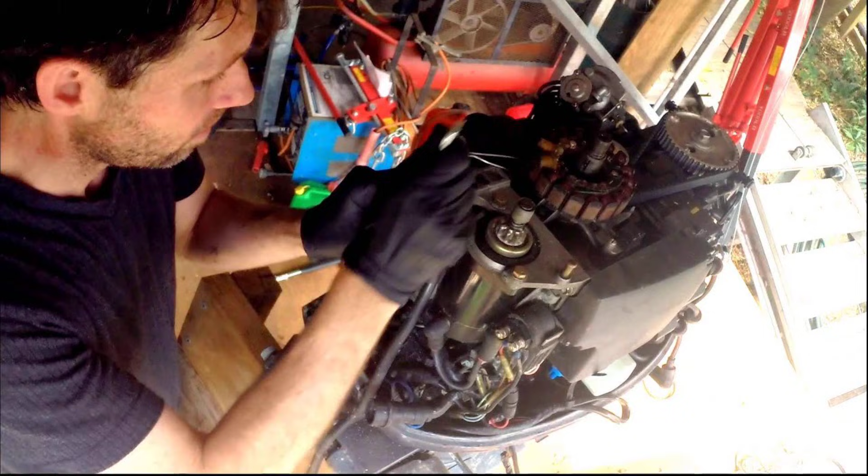A guy on a boating forum posted something that made me stop scrolling. He brought his Honda BF50 into a dealer because the engine was locking up every few rotations. Felt like the power head was seizing. The dealer quoted him over $2,500 for a rebuild, maybe a new motor entirely at $8,000.

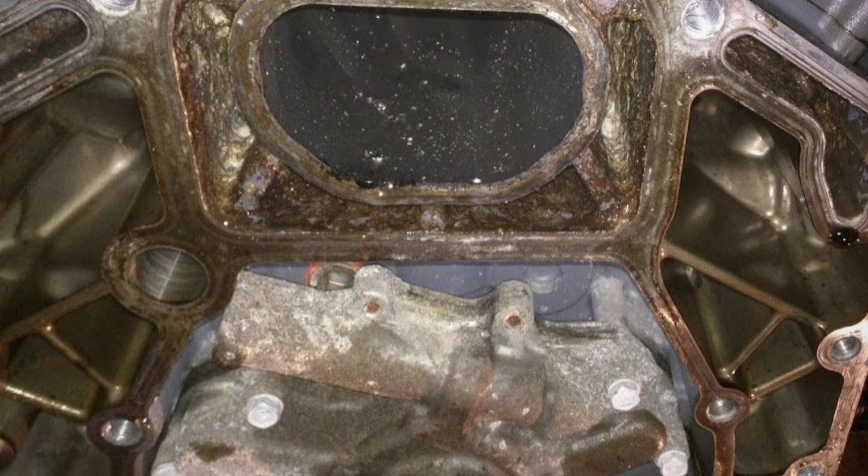The actual problem? A sheared flywheel key, a tiny metal pin that costs about $2 at any marine parts counter. 30 minutes with a socket wrench and the engine ran like new.

And that story is not even the most dramatic one. Because across every major boating forum, from the Hull Truth to iBoats to Club Sea Ray, the same pattern shows up over and over. Boat owners walk into marine dealerships with simple symptoms, walk out with repair quotes in the thousands, and later discover the fix cost less than a sandwich.

So today we are breaking down the cheap outboard parts that dealers are praying you never learn about, starting with the one that saves more boat owners more money than any other single fix in outboard repair.

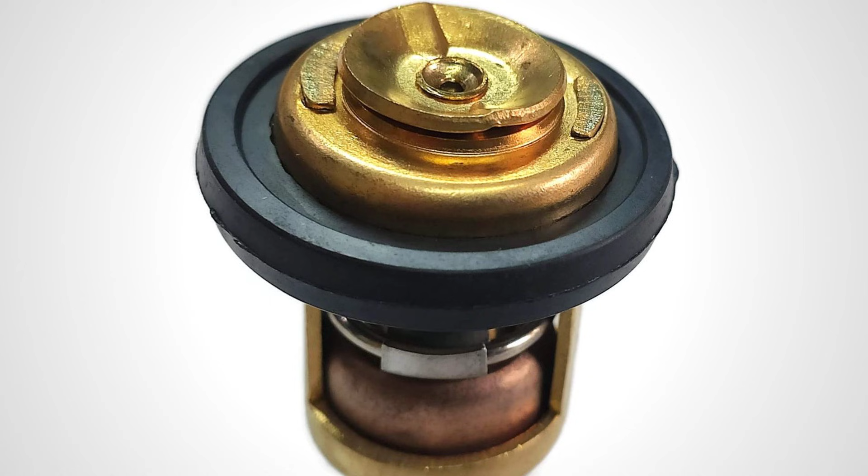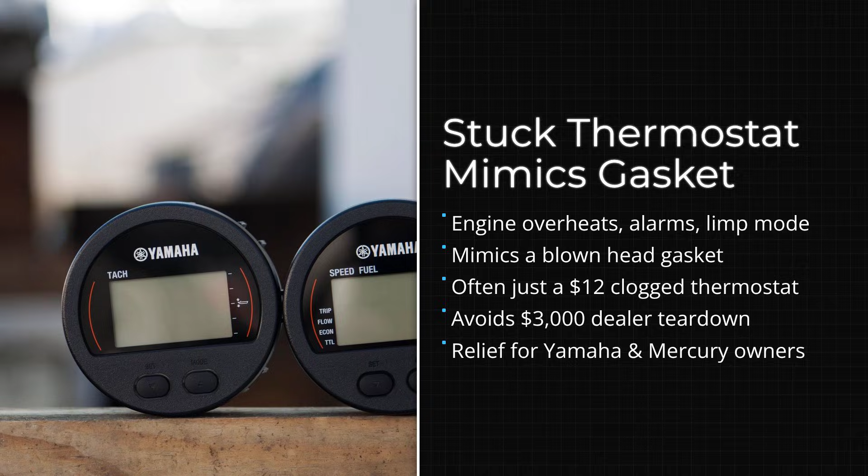The outboard thermostat. This little disc sits inside your engine's cooling system and controls water flow based on temperature. When it works, you never think about it. When it sticks closed, your engine overheats, throws alarms, drops into limp mode, and can even push milky residue into your oil. That milky oil is the trap.

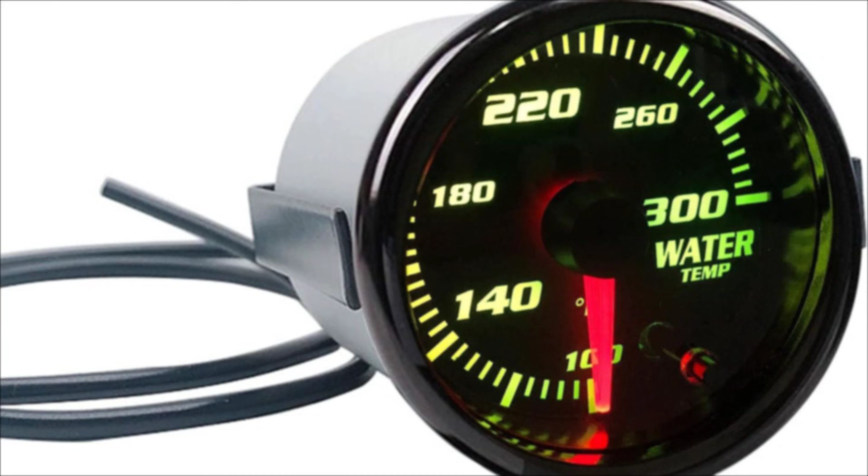Because to a dealer running diagnostics on your Yamaha F150 or your Mercury 4-stroke, milky oil plus overheating looks exactly like a blown head gasket. And a head gasket job on an outboard runs anywhere from $1,500 to $3,000 depending on the shop.

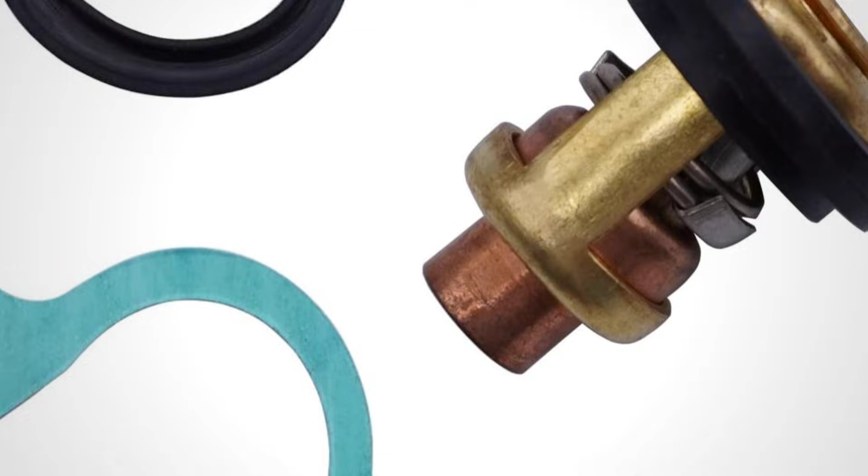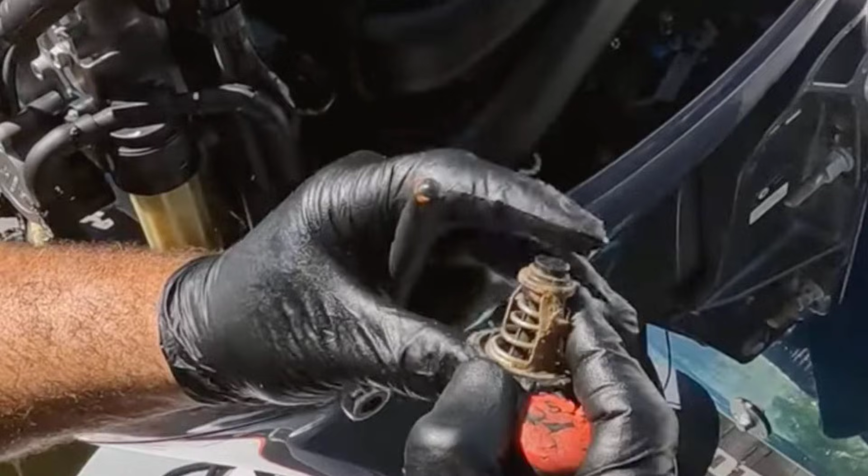But the thermostat itself, an aftermarket Sierra replacement, costs between $6 and $14. The OEM Yamaha version runs about $26 to $32. Either way, you are looking at a 15 to 30 minute swap with basic hand tools. No special equipment, no dealer software, just a screwdriver, a socket set, and a new gasket.

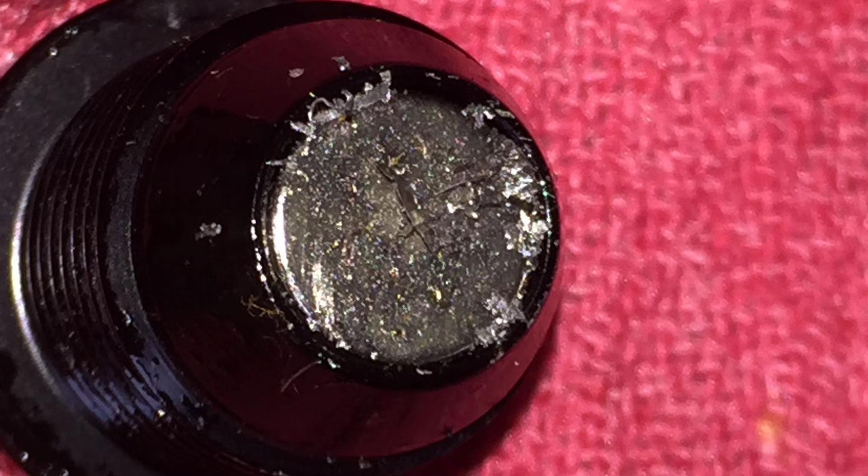On one forum, a Yamaha F150 owner traced his repeated safety mode shutdowns to a tiny piece of old gasket material that had lodged itself in the thermostat spring. That sliver of debris was the entire problem. The dealer had already started talking about cooling system overhauls.

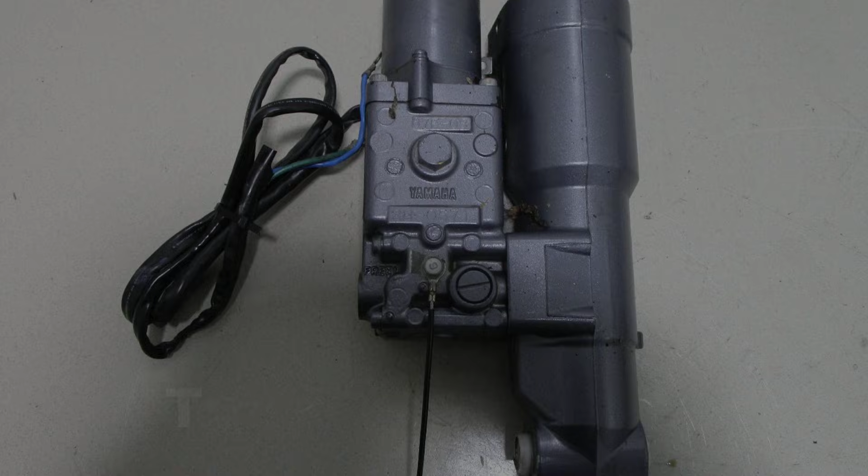Now, the thermostat is the biggest money saver, but the most satisfying fix might be this next one. Your outboard's trim and tilt system uses a hydraulic pump to raise and lower the motor. That pump is controlled by standard 5-pin 12-volt relays, the exact same type of relay you would find in any car on the road. When one of these relays fails, your trim stops working in one or both directions, and that is when the quotes start flying.

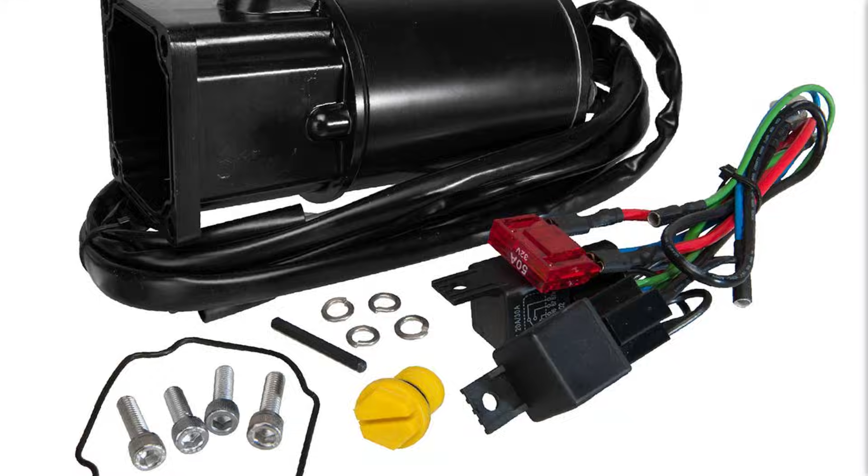Dealers will tell you the trim motor needs replacing at $400 to $800, or the hydraulic system needs a full rebuild at $800 to $2,000. Some will quote a complete new trim assembly north of $1,000.

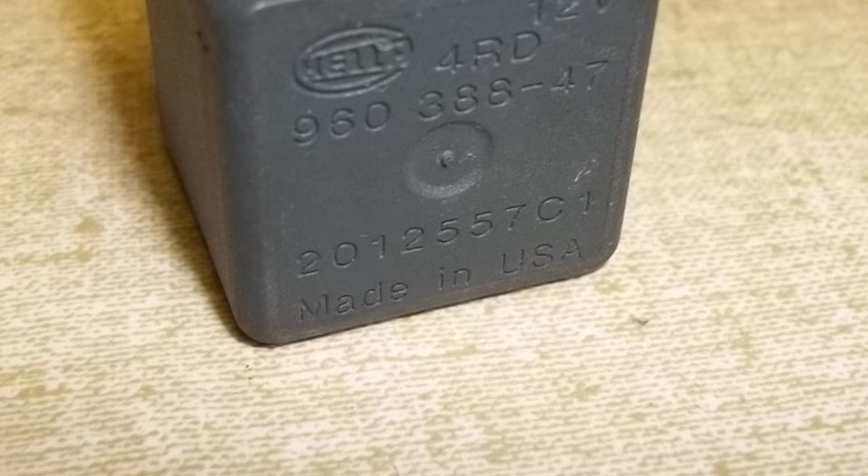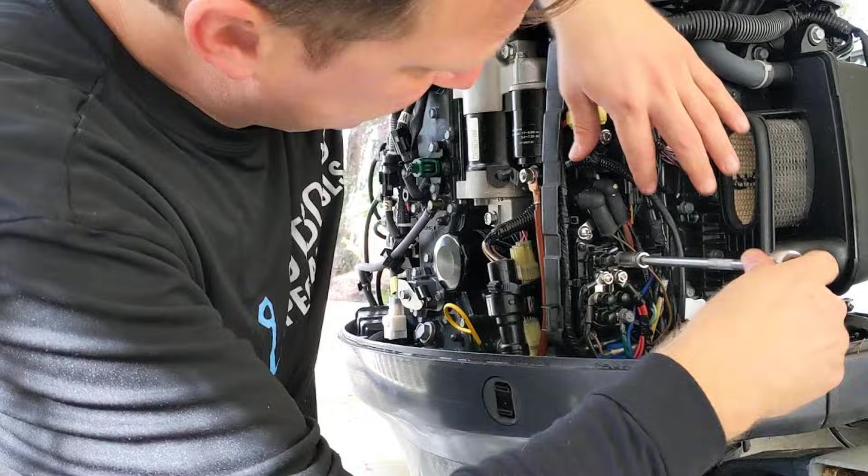The OEM Yamaha relay assembly lists for $289 from authorized sellers, but the functional relay inside that assembly is a commodity automotive part. One iBoats member bought a case of 100 waterproof relays for under $2 each. Even buying a quality single relay at AutoZone runs $10 to $15. The swap takes about 15 minutes.

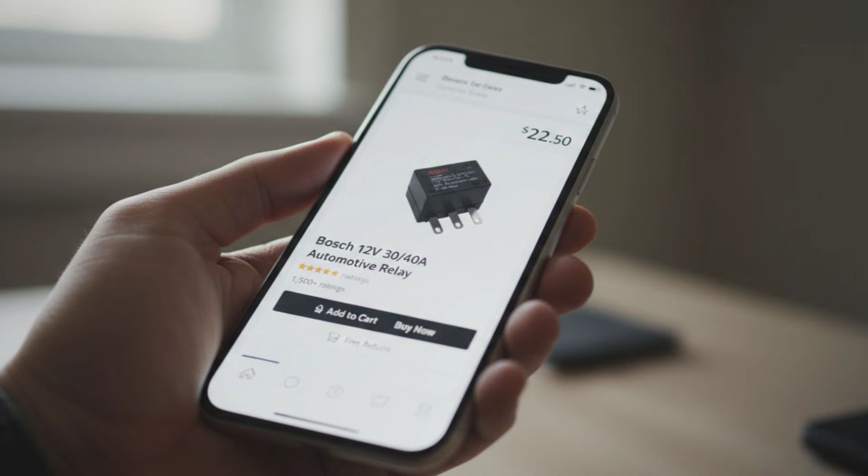A Yamaha 250 SHO owner on the Bass Fishing forums paid $300 for the OEM assembly, then discovered the same functional relay on Amazon for under $30. It lasted years without a single issue. But here is where the math really starts to sting.

Marine shops charge $125 to $180 per hour for labor. That is on par with or higher than most auto dealerships. On top of that, they charge $125 to $300 just for diagnosis before any repair begins.

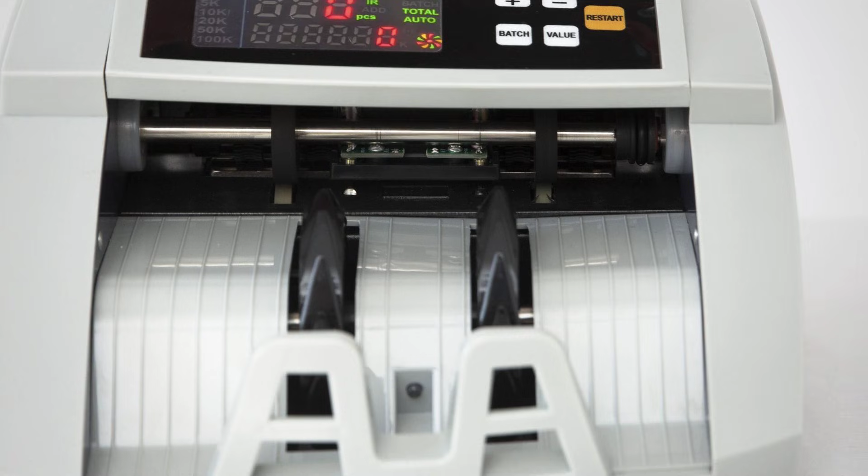And you are paying that diagnostic fee even if you decline the work. So when your outboard throws an overheating alarm because of a stuck thermostat, the meter is already running at $125 an hour, while a technician hooks up diagnostic software to confirm what a $12 part could have told you in your own driveway.

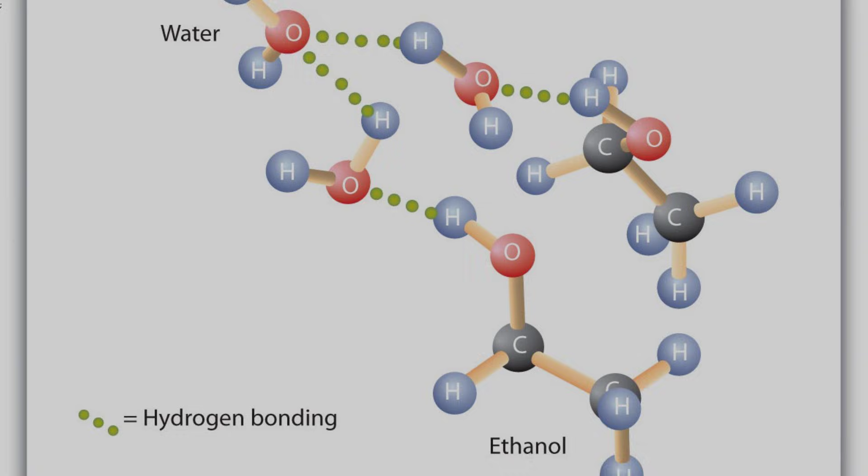And there is a reason the bills keep coming, even on well-maintained engines: ethanol blended fuel. E10 gasoline is hygroscopic, meaning it pulls moisture out of the air. In a marine environment where humidity is constant, that fuel can start degrading in as little as 15 to 30 days.

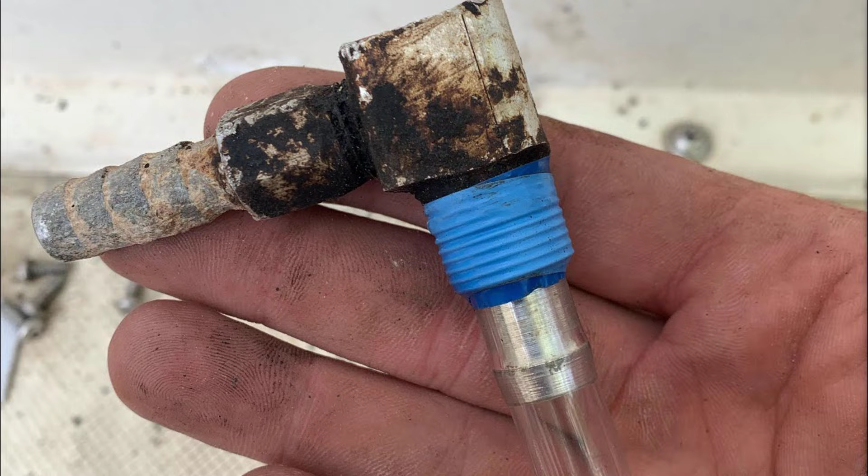Ethanol dissolves rubber fuel lines, eats away at plastic fuel system components, and loosens varnish deposits that clog injectors and carburetor jets. Honda's own documentation warns that ethanol-blended fuel can dissolve components in fuel storage and delivery systems. One marine mechanic estimated that 90% of his injector cleaning business comes directly from E10-related damage.

The fix is almost embarrassingly simple. A bottle of marine fuel stabilizer like Stabil 360 Marine or Startron costs $10 to $25 and lasts an entire season. That one purchase prevents the rolling cycle of fuel pump diaphragm failures, clogged filters, and deteriorating primer bulbs that generate hundreds or thousands in dealer invoices every year.

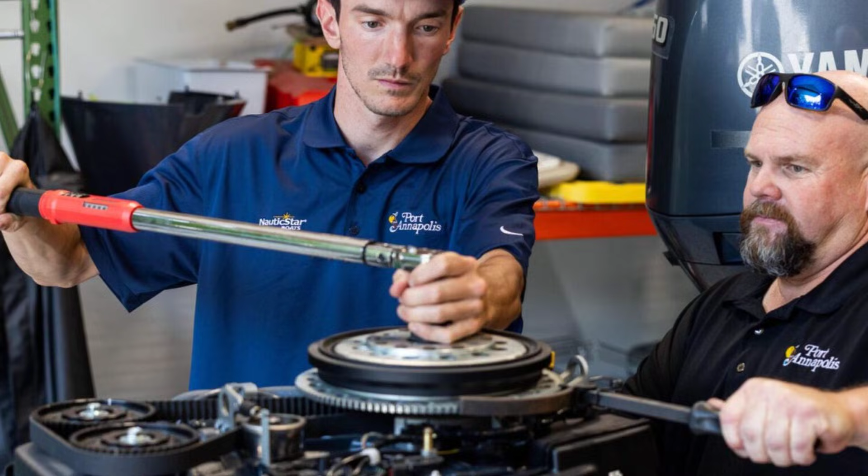Now, 2 more dirt cheap fixes that are almost too simple to believe.

On Honda outboards, a blown inline fuse can kill every electrical system on the motor. The engine appears completely dead. No crank, no lights, nothing. Dealers will diagnose starter motor failure at $200 to $500, or an ignition switch replacement, or a full electrical fault. The actual fix is a fuse from any auto parts store for $1 to $5, swapped in about 2 minutes.

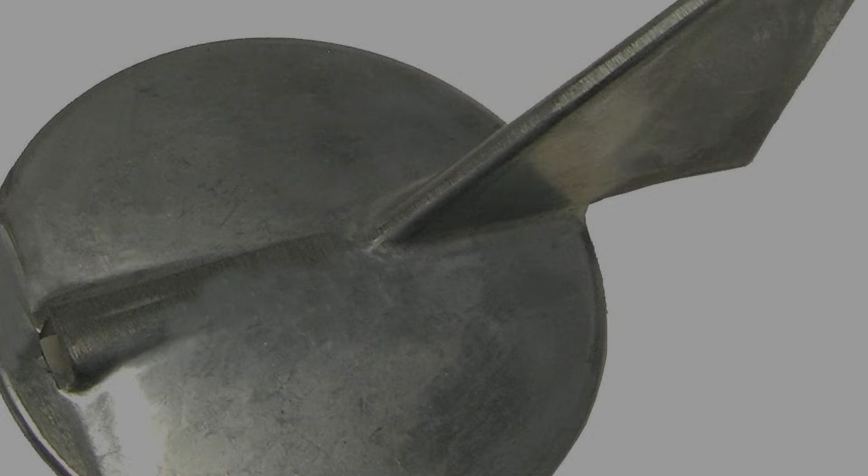And those sacrificial zinc anodes bolted to your lower unit? The ones that cost $8 to $14 and take 5 minutes to replace with a single wrench? Skip those for a season or two, and galvanic corrosion starts eating through your lower unit housing. That is a repair costing $1,000 to $3,000, which a $12 zinc could have prevented entirely.

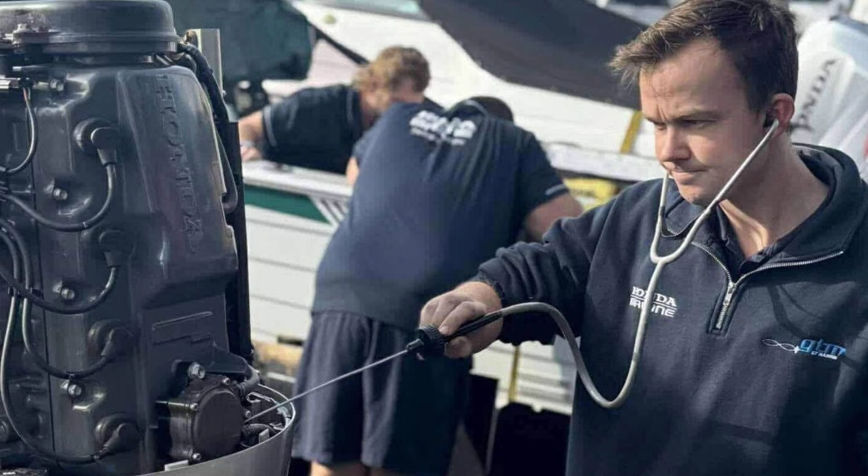The most striking story from all of this research came from the trawler forum. An owner paid $5,200 for exhaust manifold and elbow repairs using refurbished parts. A different mechanic later looked at the boat, diagnosed the real problem in about 2 minutes, and pointed to a faulty pressure cap, the kind that costs $15 to $25 at any marine supply store. That is a $5,175 gap between what the owner paid and what the repair actually required.

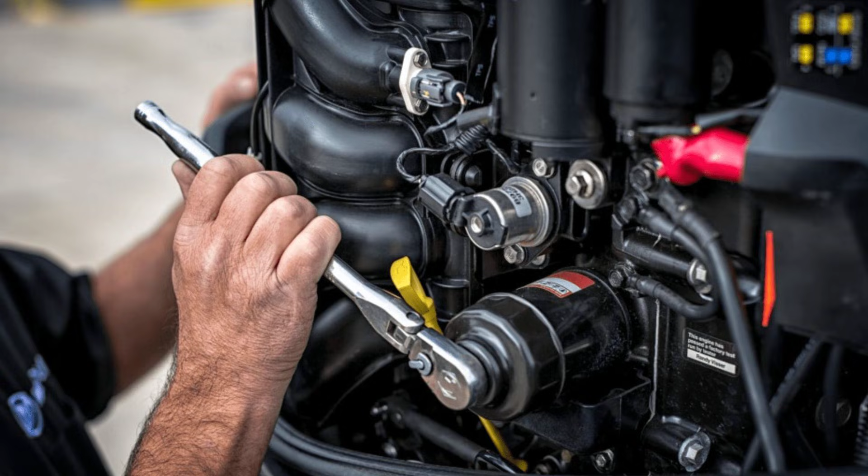Nobody is saying marine technicians do not deserve fair pay. Shops have overhead, specialized tools, and a real technician shortage that drives costs up. But when a $12 thermostat becomes a $3,000 head gasket quote, or a $2 relay turns into a $2,000 hydraulic rebuild, the system is not working for the boat owner anymore.

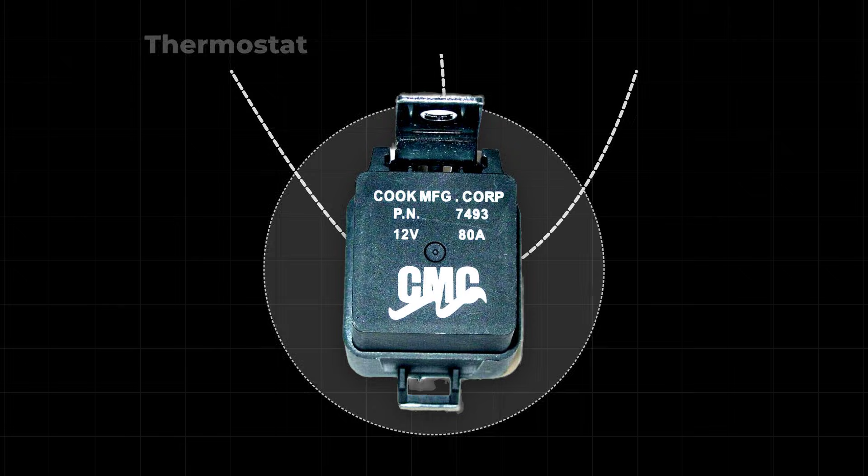The fix is not complicated. Learn what these cheap parts look like, where they live on your engine, and what symptoms they cause when they fail. Because the most expensive outboard repair is almost always the one you did not need.